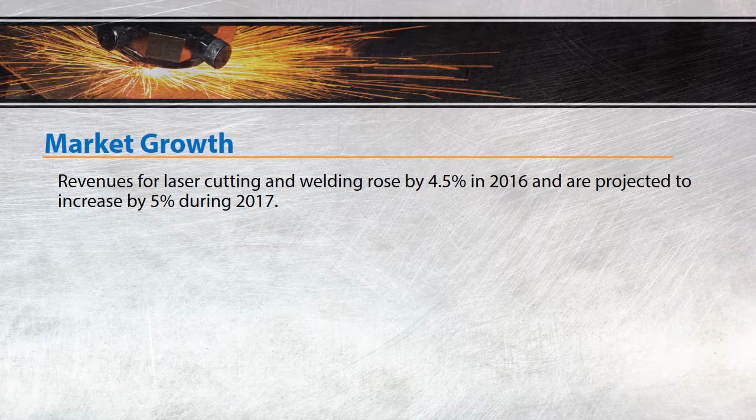According to an article issued by Industrial Laser Solutions for Manufacturing, revenues for laser cutting rose nearly 5% in 2016 and are projected to continue in a similar growth pattern over the next several years. Laser revenues increased from $1.42 billion in 2015 to a projected $1.56 billion in 2017. That's incredibly significant. Laser sales have been on the incline since the recovery from the 2008-2009 recession.

However, improvements to the fiber cutting laser technology over the past 3 or 4 years have created a demand in this market surpassing previous trends. More specifically, industrial lasers have been outperforming the machine tool sector for the past 2 years. Again, this is due to the demand for high-power fiber lasers.

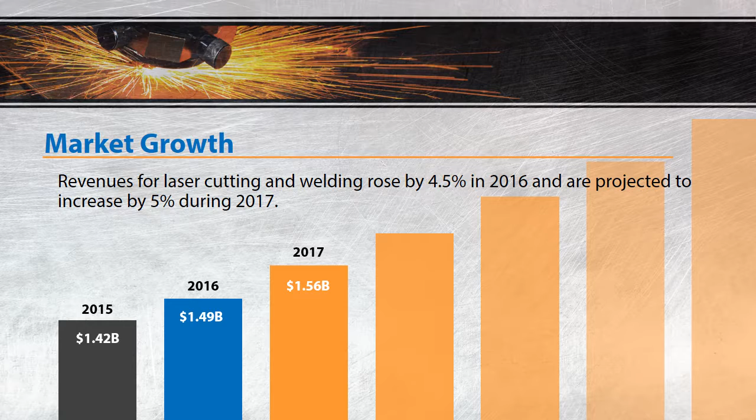Speaking of lasers, let's talk about the different types we're going to use for today's discussion: the fiber laser, the CO2 laser, and for today's discussion, we'll call the other category just 'other.' We can see from the chart that fiber lasers are 44% of the market. Why? Their increased efficiency means they cut faster, and decreased energy means they're less expensive to operate. Although fiber lasers have been around for several years, the technology has improved drastically over the past 3 to 4.

In fact, it's interesting to note that at power levels from 8 to 12 kW, the fiber laser can cut with the same quality as the CO2 laser, only faster.

I had the opportunity last year to visit FabTech in Las Vegas. It was great to meet many of our customers, and I had a great experience. I was excited to come back and share what I learned with my colleagues here at Hycomp.

According to 5 of the top laser manufacturers—Trumpf, Amada, Mazak, Bystronic, and Mitsubishi—they forecast a combined 800 new fiber laser systems into the USA this year, with an additional 100 in Canada, Mexico, and South America. This number should increase to 900 in 2018 and 1,000 in 2019. They're not seeing any pattern for slowing down new fiber laser sales in the United States.

Keep in mind, there's a strong possibility that 50% or more of the new laser owners will be able to justify in-house nitrogen generation based on their assist gas consumption and usage. We'll get into more details about assist gas in a moment, but I wanted to highlight the real opportunity in this market. One other interesting fact I noted at the show is that there was only one CO2 laser on display. We can see the fiber laser is taking over this market.

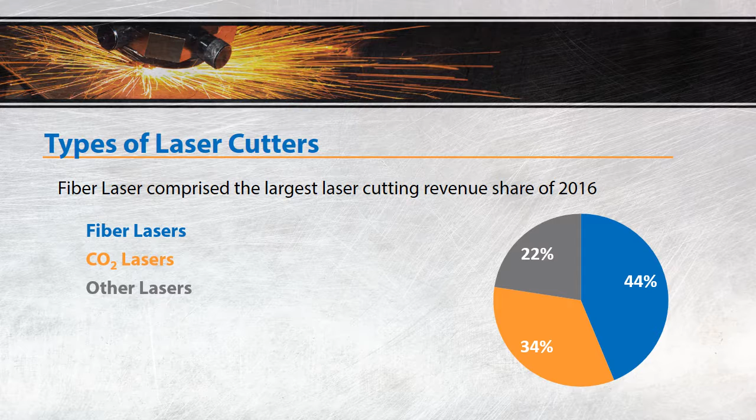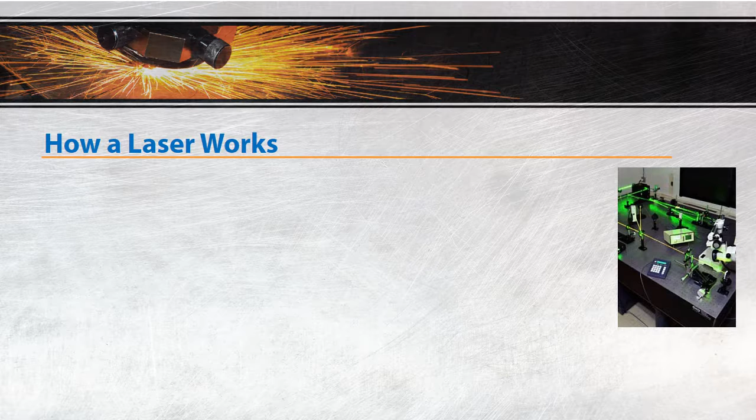Now we're going to turn it over to Robert, and he's going to discuss how lasers actually work. Let's take a little bit of time and talk about the basics of laser cutting machines. Many people don't know that the word laser is really an acronym that stands for Light Amplification by Stimulated Emission of Radiation. Quite a mouthful for a laser.

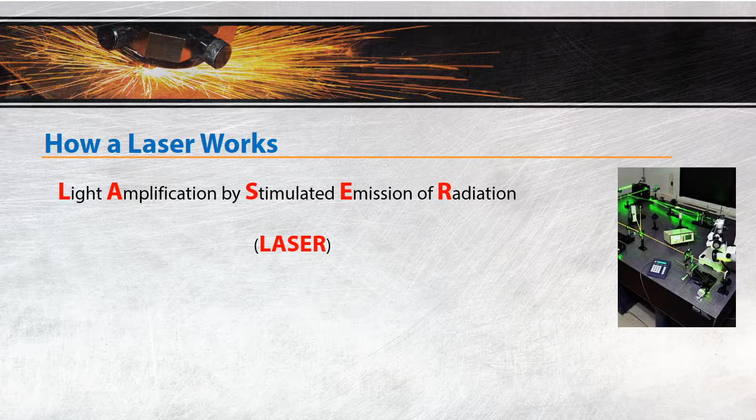A simple laser consists of 3 parts: an energy source to excite the electrons. In most cases, that energy source is a high-powered light, like a flash tube in your camera. The second is the lasing medium, which is the material, like CO2 gas, in which the atoms are excited, producing photons that are the actual laser light.

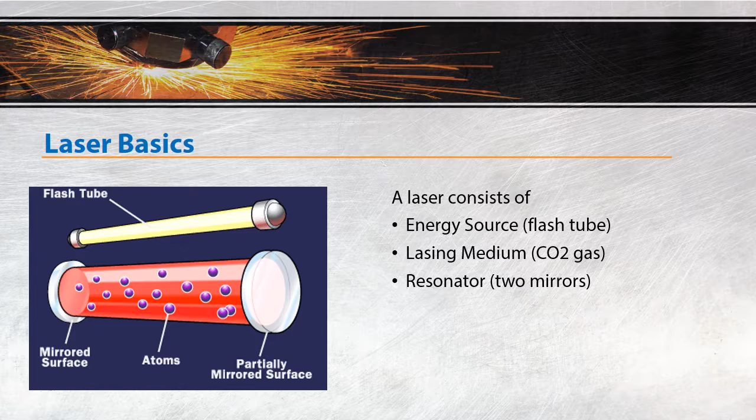It is important to note that laser light is not the light from the flash tube. It's actually the light produced in the lasing medium. And finally, we have the resonator, which is a set of mirrors that bounce the photons back and forth that are emitted from the lasing medium.

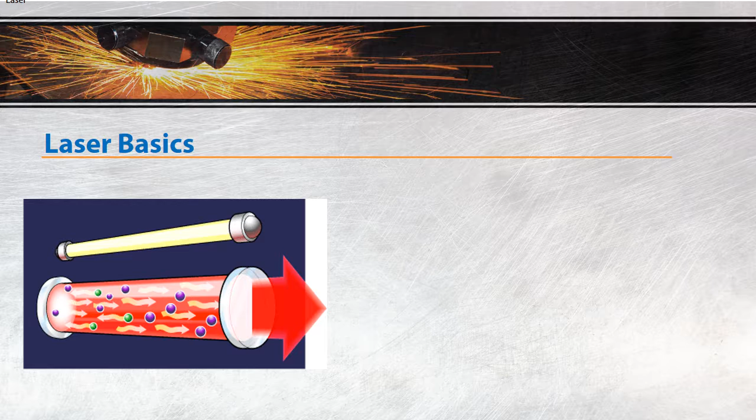In simple theory, the flash tube injects high energy light into the lasing medium. The light excites atoms in the medium, which subsequently emit photons. Those photons are identical in wavelength, what we see as color, and are coherent, meaning their wave crests and valleys are aligned. The photons resonate back and forth off the mirrors, and those passing through the lasing medium stimulate additional photon emission in other atoms. Finally, laser light is emitted through the partially mirrored end, often referred to as the output coupler.

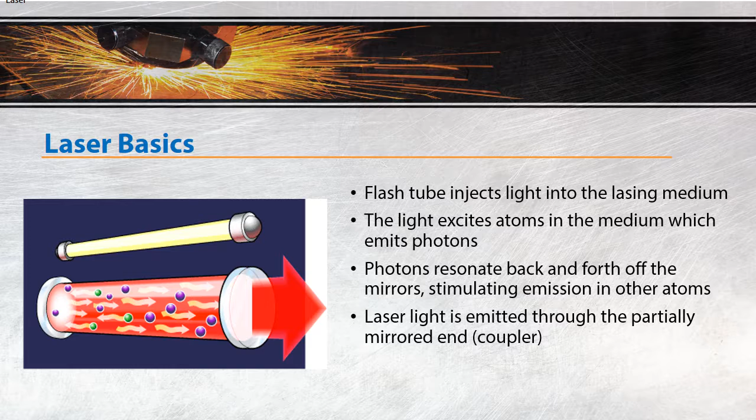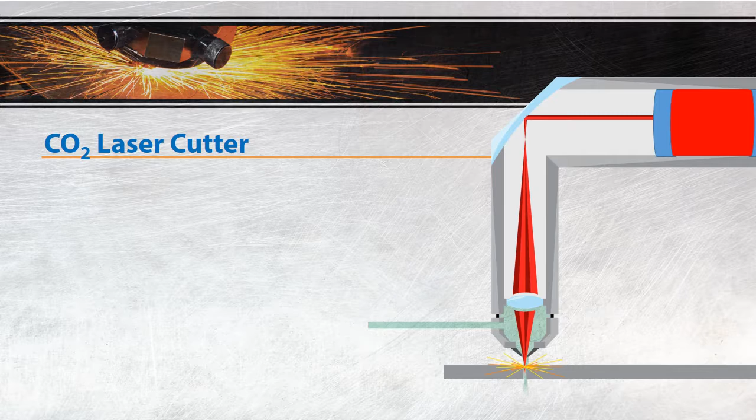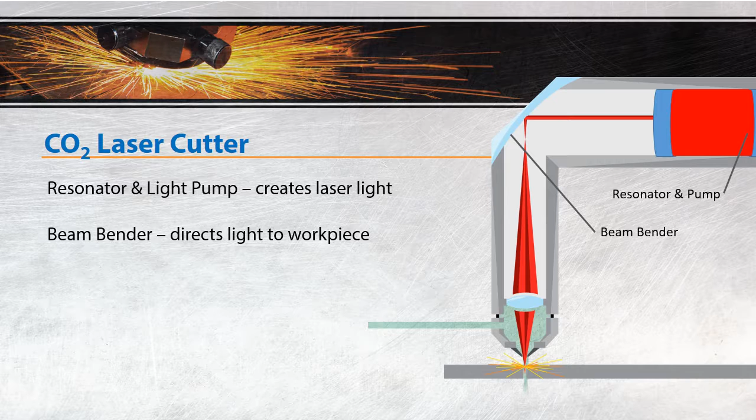One of the most common lasing mediums in the laser cutting industry is a CO2 gas mixture, hence the term CO2 laser Kelly mentioned previously. These laser cutters utilize the same basic concept of a resonator, lasing medium, and light pump to create the laser light. A beam bending mirror then directs the laser light to the workpiece. A focal lens intensifies the laser light to a fine point.

The assist gas, which is what we're mostly interested in today, protects the lens and sometimes the mirrors, and cleans the cut of molten metal. And finally, the focal point is the maximum focus point for the greatest heat.

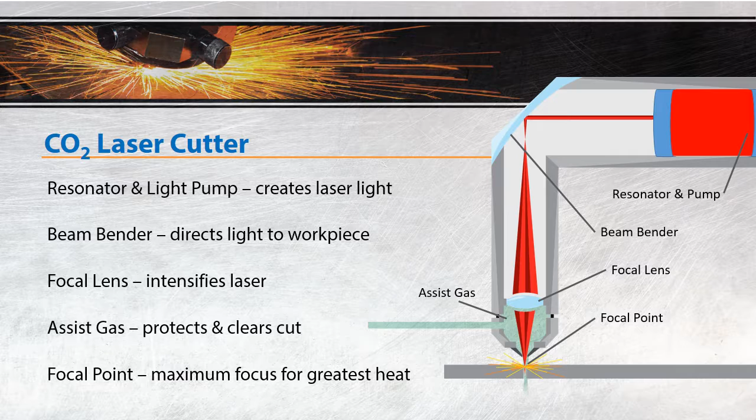Now, one thing to remember, a real CO2 laser is certainly more complicated as the cutting head must move around a 4 by 8 foot piece of material. So many mirrors are utilized to direct the laser light to the cutting head.

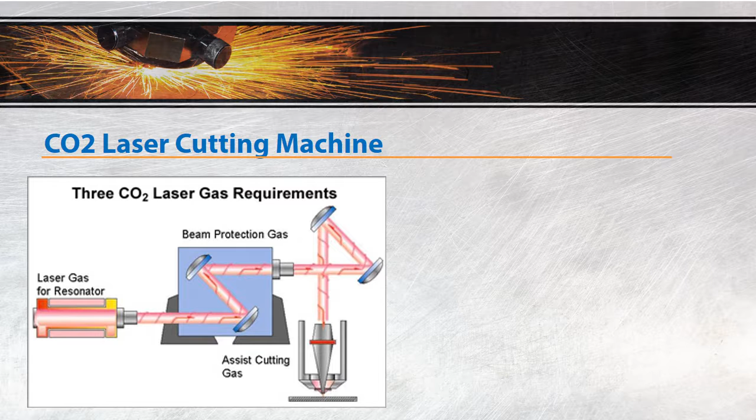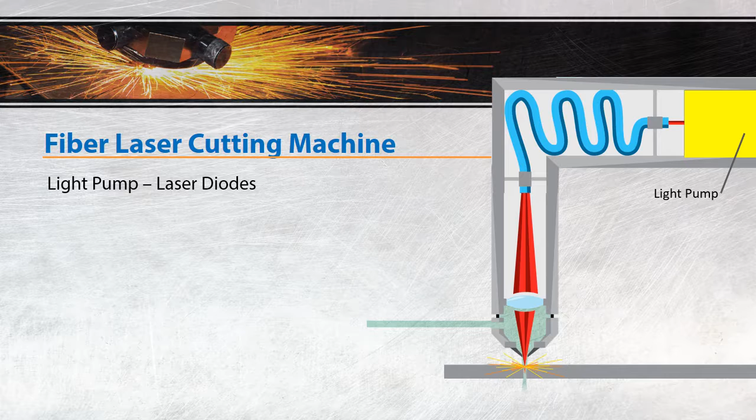Fiber lasers are similar in concept but different in design and build. Instead of a flash bulb as the energy source or light pump, they utilize laser diodes, which are similar to a high-energy LED that many of you are likely familiar with. Perhaps the biggest difference is the lasing medium and resonator.

Rather than CO2 and mirrors, a fiber optic cable is utilized. The fiber optic has been embedded with rare earth elements, often erbium or yttrium, and it is these rare earth elements that are the lasing medium. The fiber has small pieces of etched glass at the two ends that reflect the light created from the rare earth elements, thereby acting as mirrors and causing the photons to resonate and increase energy.

There is still a focal lens to intensify the light to a single point. Assist gas is actually more critical because a fiber laser has a much higher power density than a CO2 laser, and therefore requires even more gas to blow out the cut in order to take full advantage of the possible cutting speed. And certainly there is a focal point where the laser light is most focused in order to produce the most heat.

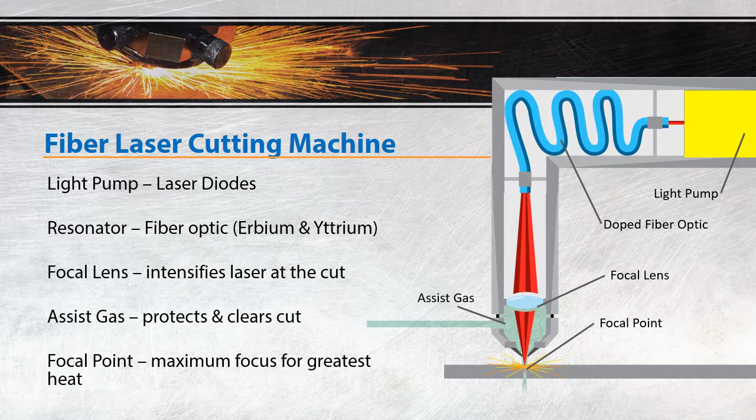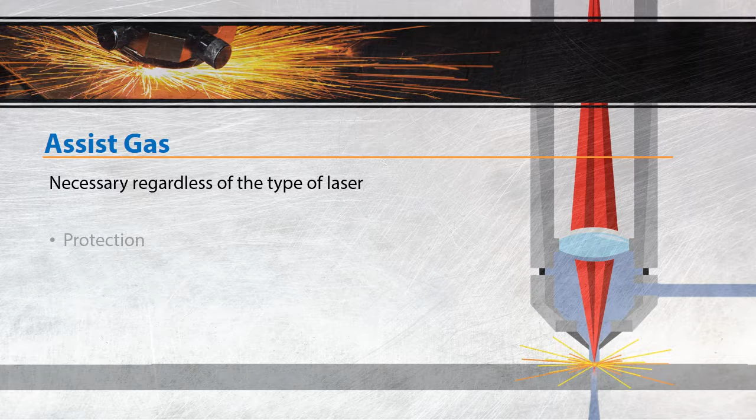Assist gas is actually a bit of a misnomer because it's really more of a partner than an assistant. As we saw, assist gas is necessary regardless of the type of laser, and it performs several functions. First and perhaps foremost, it protects the focusing lens from debris and damage. Next, it evacuates the molten metal from the cut. It's important to remember here that a laser doesn't vaporize the metal, it actually just melts it. And in order to achieve maximum cutting speed, that molten metal must be removed quickly.

Finally, in some cases, assist gas will actually aid in producing a hotter focal point, allowing for cuts in thicker materials.

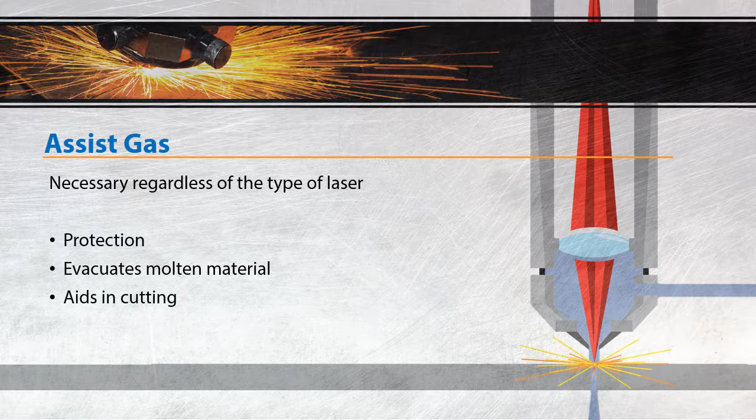There are three basic types of assist gas in use for laser cutting: oxygen, nitrogen, and air, which is of course 78% nitrogen, 21% oxygen, and balance argon, CO2, and other gases.

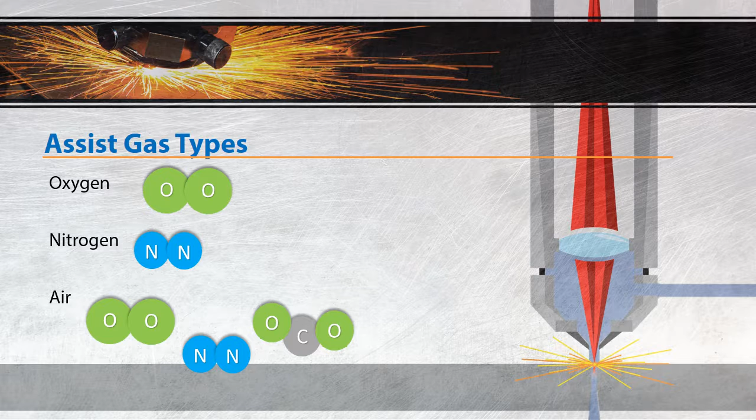Now, oxygen is actually exothermic, meaning it has a heating effect when used as an assist gas. Not surprising if you're familiar with an oxyacetylene torch. But this means that the laser can utilize oxygen as the assist gas in order to cut thicker materials, as it in essence increases the power of the laser.

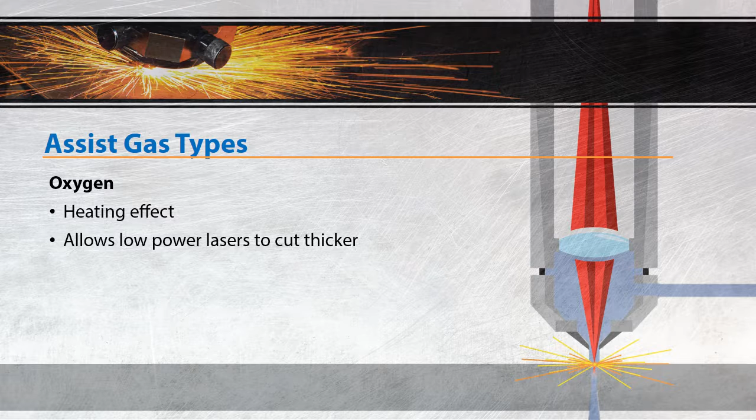Conventionally, it has been used on mild steel with thicker materials, although it has been used successfully on thick stainless as well. The pressure and flow requirements are fairly low, with pressures ranging in the 20 to 28 psi range. In fact, too much pressure or flow will cause the cut to widen significantly, leading to poor cut quality and dimensional failures. Of course, the downside to oxygen as an assist gas is that it leaves a heavy amount of oxidation on the cut edges, requiring a significant amount of post-production work.

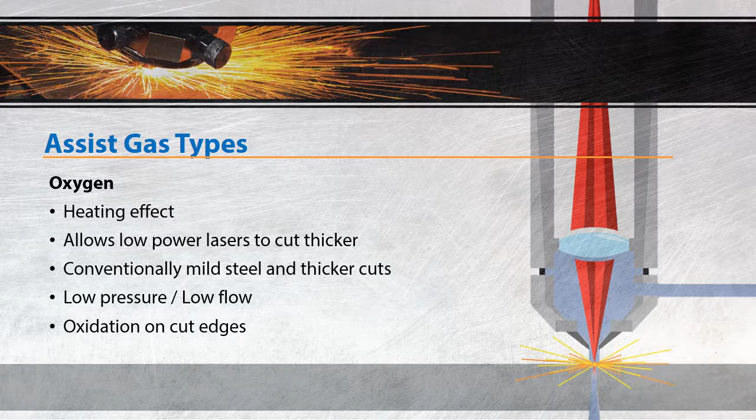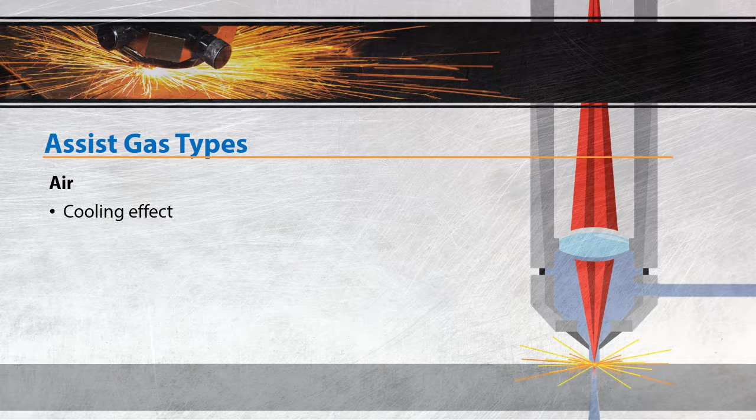Air has seen some popularity recently as assist gas. It actually has a cooling effect, which is not surprising when you think about a burst of air over molten metal—it's going to solidify that metal. Conventionally, it is used on thin carbon steel, where the edges are small and oxidation is limited. It also sees use on aluminum, since the small amount of aluminum oxide formed is clear to white and can actually give a nice looking protective coating to the finished part.

Significantly higher pressures and flows are required than with oxygen, and since it comes off a compressed air system, great care must be taken to ensure no oils are in the assist air. Obviously, there will still be some oxidation, but generally not considerable amounts, as air is still 78% inert nitrogen.

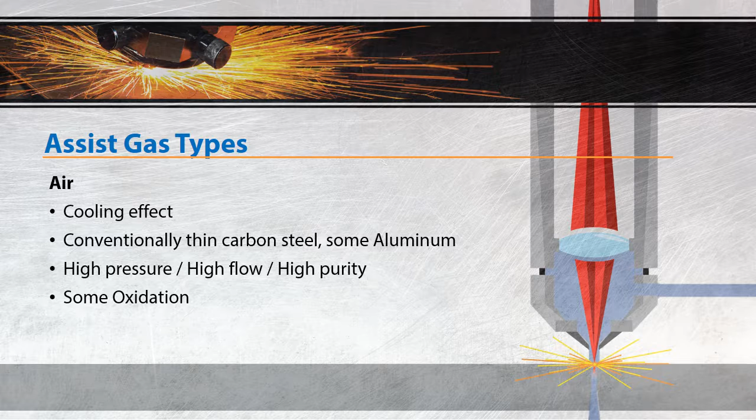Our final assist gas, and the one that we're really here to talk about, is nitrogen. Nitrogen has a similar cooling effect to air. Conventionally, it has been used on thinner stainless materials. I'm sure you understand that no one wants rust on their stainless parts.

But with the advent of the more powerful fiber lasers, lower cost in-house nitrogen generation, and the push to move away from post-processing operations like oxidation removal, you're going to start to see nitrogen used on carbon steel applications as well, which is obviously exciting for us as an industry.

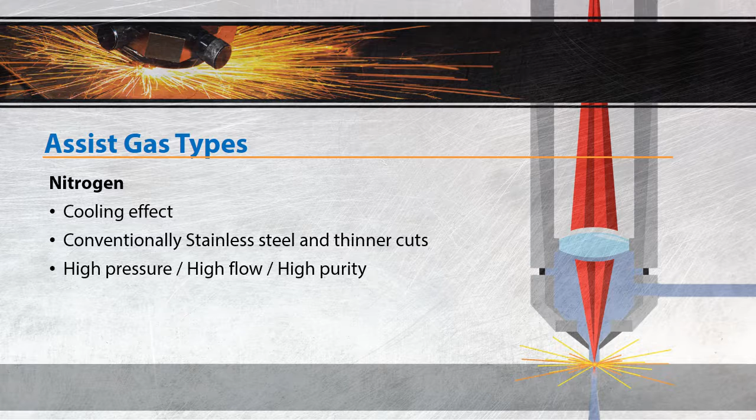Similar to air, high pressures and flows are required, again especially for fiber lasers, as they are capable of much higher cutting speeds and need that molten metal evacuated quickly. Certainly similar purity requirements exist to ensure a clean lens and clean cuts. The obvious big benefit is the entire lack of oxidation when utilizing nitrogen. We see a huge potential over the next few years for in-house nitrogen generation and find this to be a pretty exciting time for this product line.

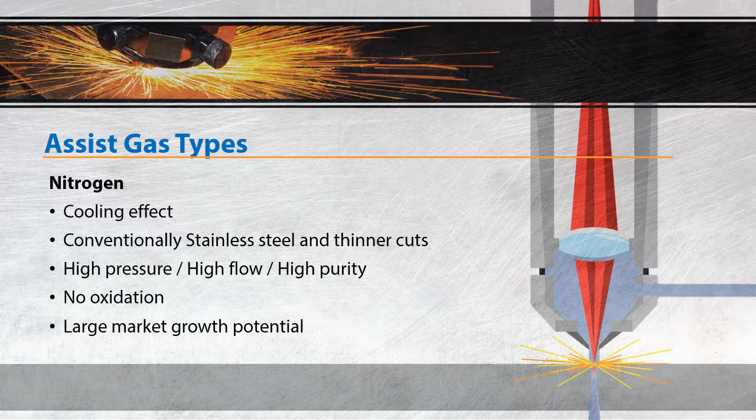So how much assist gas is required? Unfortunately, it varies widely. Things like material—whether you're cutting stainless, carbon steel, or aluminum—and the thickness of that material. Thicker materials require more assist gas to evacuate the molten metal.

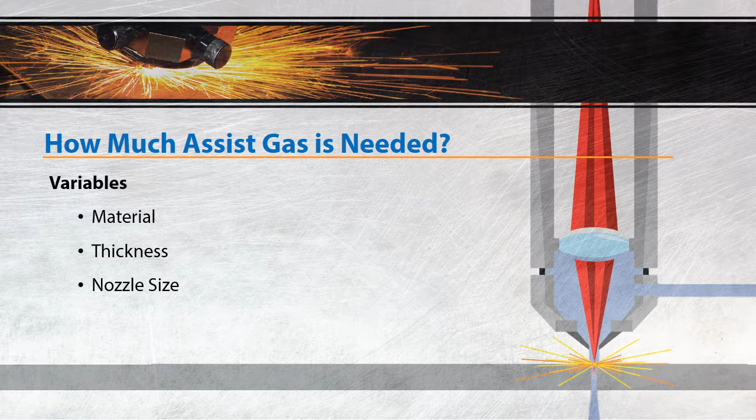Nozzle size—you may be familiar with flow through an orifice. Well, that's really all this is, and just like an orifice, the flow rate increases exponentially with size. For example, a 3 millimeter nozzle uses twice the flow of a 2.5 millimeter nozzle. And finally, cut speed and edge quality will affect how much gas your customer uses.

Real quick, this question—how much nitrogen do you need—is really the key question to help us understand if your customer can justify in-house nitrogen generation. So this piece of the puzzle is key, very important. Absolutely. Return on investment is going to almost entirely depend upon how much gas the customer is using, and the cost of that gas.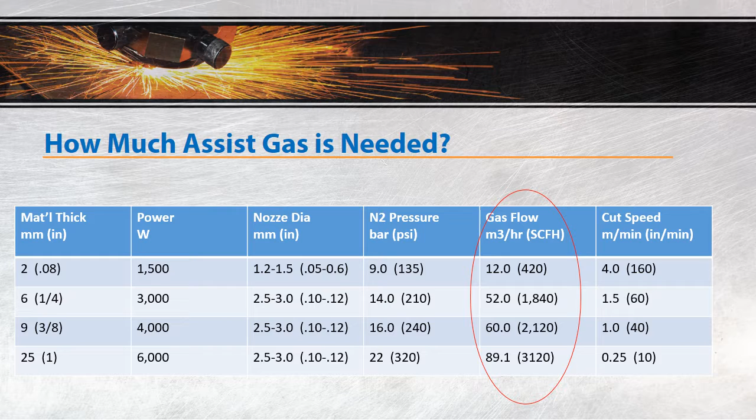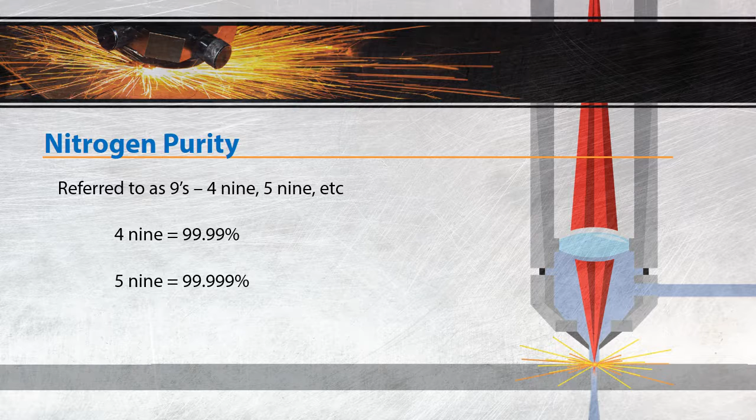Another important aspect to consider is the purity of that nitrogen. One of the terms you're going to come across is 4 nine or 5 nine purities. This is generally in reference to the amount of oxygen present in the gas. To clear the proverbial air, 4 nine is 99.99% nitrogen, or less than 100 ppm of oxygen, while 5 nine is less than 10 ppm of oxygen, or 99.999%.

Another concern with nitrogen purity is the amount of hydrocarbons present. Oils are an absolute no-no when it comes to laser cutting. The standard recommendation for laser cutting cleanliness is ISO 8573.1, Class 1, which has a limit of less than 0.008 parts per million of hydrocarbon—that's 8 parts per billion.

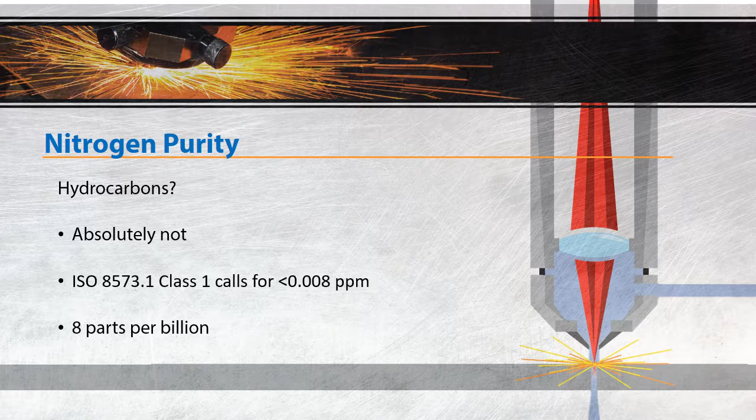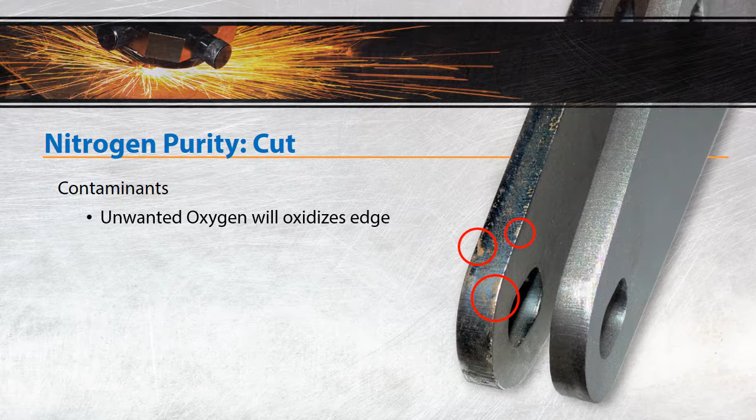Purity affects the cut quality of the workpiece. Unwanted oxygen leads to rust on the edges of a stainless or steel part, and oil in the assist gas will cause the laser to burn hot, resulting in poor cut quality. Either of these two purity issues lead to additional post-processing costs.

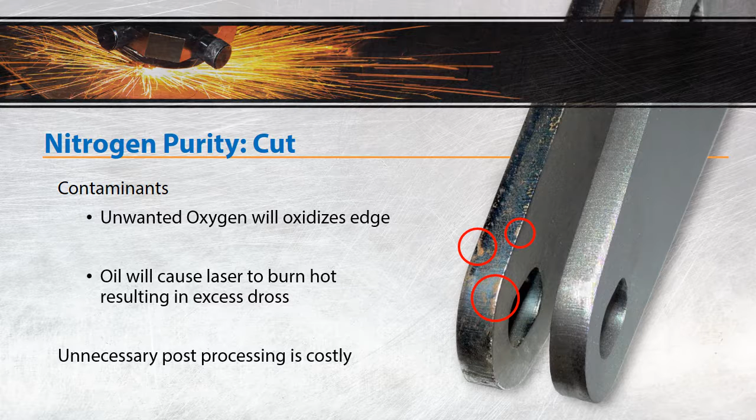The larger concern, however, is with oil damaging the optics of a laser. If the lenses or mirrors of the laser are covered in an oil film from the gas, two major problems will occur. The first is a decrease in laser efficiency due to scattering of the laser light, which means slower cuts and higher cost per part made. But worse, once an optical lens or mirror gets dirty, they will begin to retain heat from the laser, which then warps that optical piece.

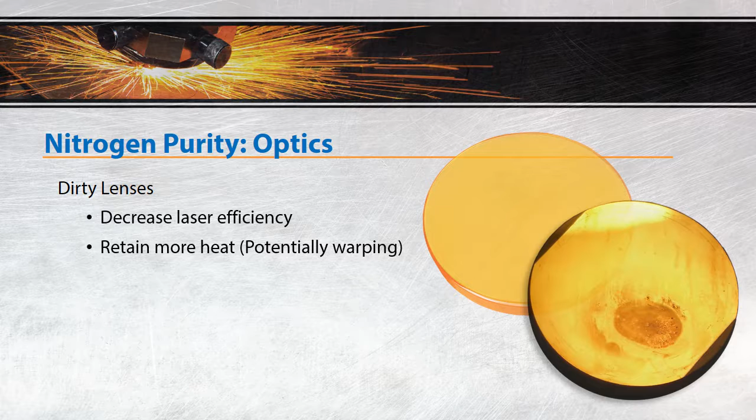As you can imagine, that means the optical device must be replaced. So what's the cost of contamination? A simple optics replacement can run $15,000 to $18,000.

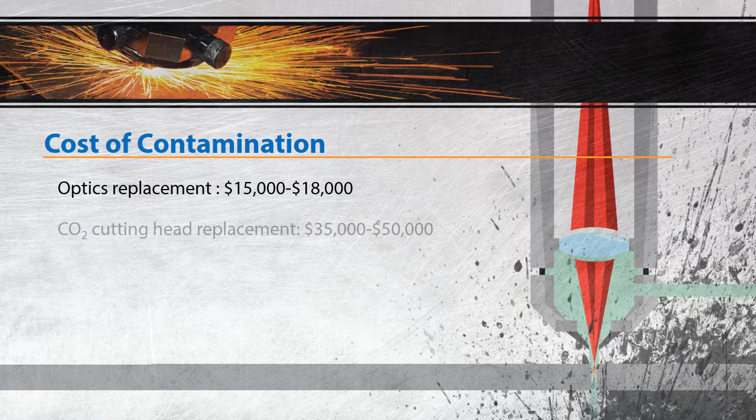If it gets really bad, a full CO2 cutting head replacement is $35,000 to $50,000, while a fiber laser cutting head replacement can run up to over $100,000. I'll share with you a quick report from an end user, a laser user.

$250,000 of damages due to a filtration failure that did allow some hydrocarbons to contaminate the laser. To put that into perspective, the average CO2 laser is $900,000 and the average fiber laser is $1.25 million. So $250,000 in repair due to contamination is quite significant, and certainly makes us understand why it's so important to have pure, clean gas for that customer.

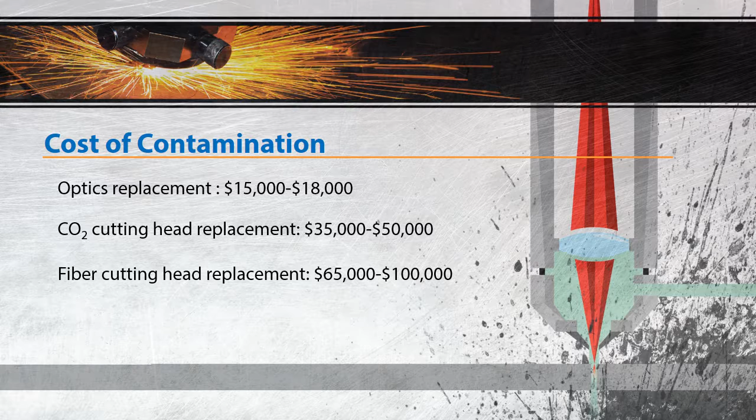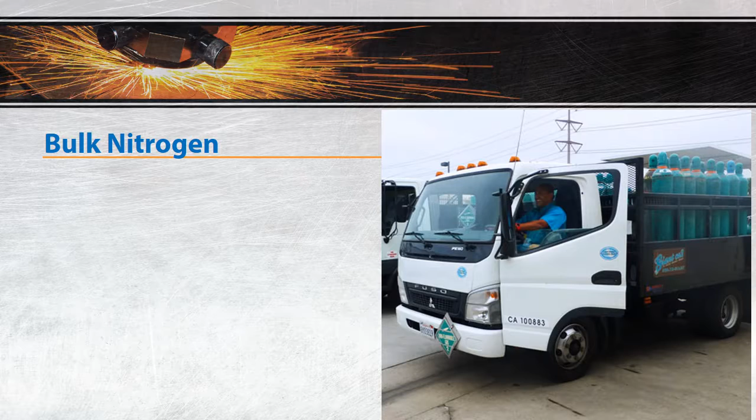At this point, I'm going to turn the time over to Ken to talk about sources of nitrogen assist gas. Thanks so much, Robert. Understanding how the laser works will give our attendees confidence when presenting to their customers. Let's talk about the various sources of nitrogen and how they're different.

Bulk nitrogen is delivered in two forms or phases, liquid or gas. The advantage of bulk nitrogen is you are guaranteed the purity of the gas. I want to share with you some of the cons of bulk nitrogen delivery.

First of all, logistics and safety. Nitrogen delivery is an added labor for you and your customer, and is provided in high pressure tanks. Typically, DOT bottles are about 2200 psig, maybe even higher. Safety is always a concern when you're dealing with high pressure gas, toxic gas, along with potential delivery accidents.

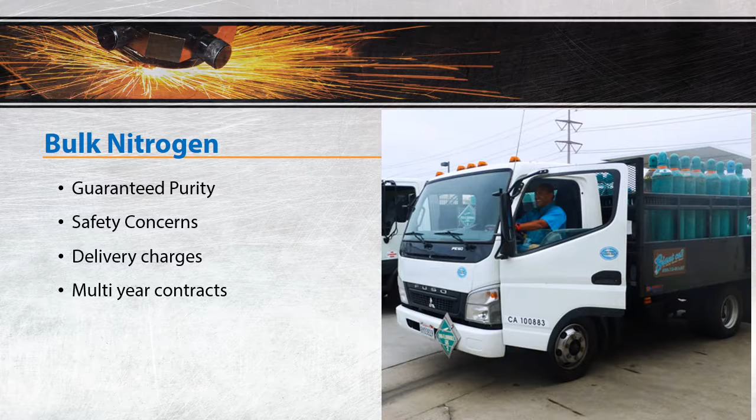Typically, there are delivery charges each time the gas is provided from the bulk provider. Most bulk providers have your customer sign long-term contracts. Your customer may or may not like their contract years later. Exiting a bulk nitrogen contract typically is not easy and frequently requires long advance notice. And then, of course, you've got that monthly bill.

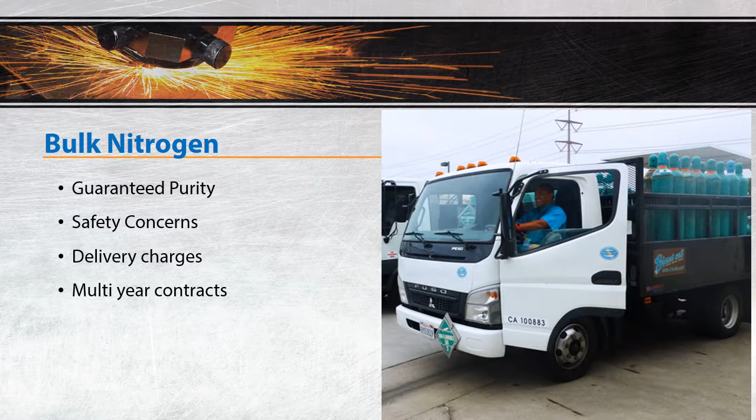Let's talk about liquid nitrogen delivery. Nitrogen in liquid form is minus 321F or minus 196C. The liquid nitrogen then moves to the heat exchanger where the nitrogen temperature is raised. In the gas phase, the nitrogen is regulated to a usable pressure.

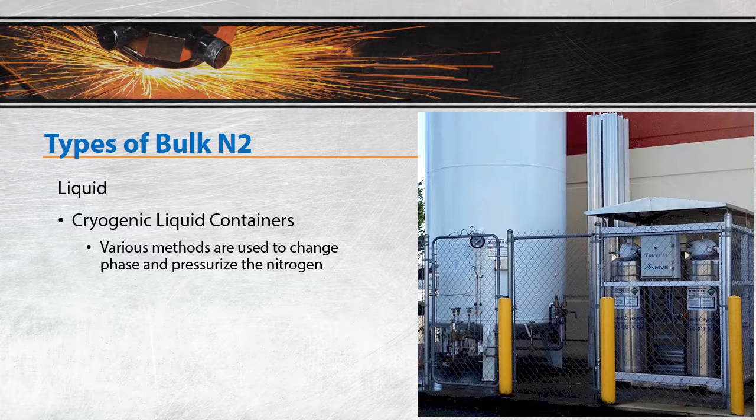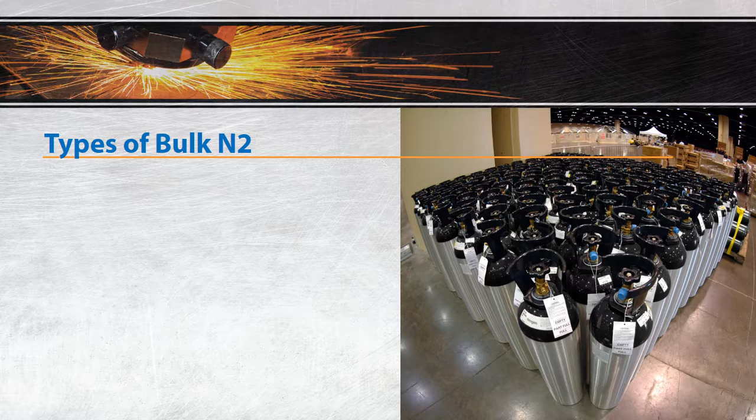Bulk nitrogen is typically delivered in high-pressure DOT cylinders. This is very common to those who are low users of nitrogen. The pressurized cylinder is depleted until you reach the pressure used by your laser. Consequently, the remaining gas is returned to the vendor, even though your customer has already paid for it.

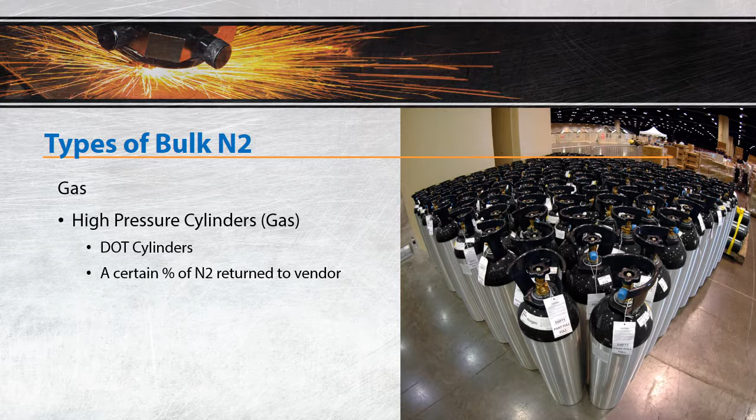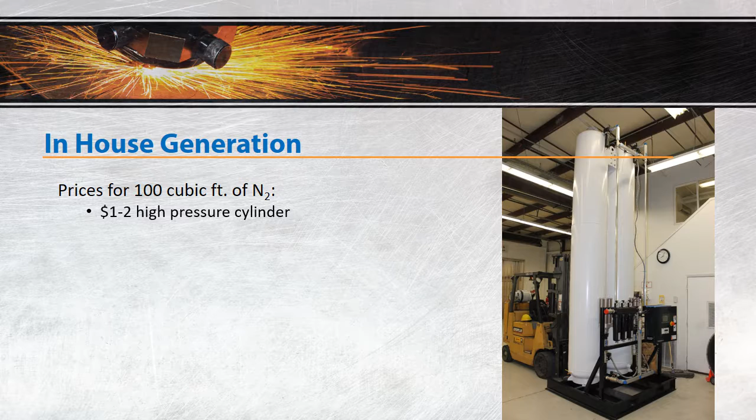Now let's look at how bulk nitrogen compares with in-house generation, speaking in terms of 100 cubic feet in pricing. High-pressure cylinders are about $1 to $2 per 100 cubic feet of nitrogen. Bulk liquid is less expensive at about 50 to 75 cents. Now, this is what is significant.

Wait for it. Thanks, Kelly. Drum roll, please. In-house generation is about 12 to 15 cents per that same 100 cubic feet of nitrogen. And we've just had a report recently of as low as 8 cents per 100 cubic feet for in-house generation.

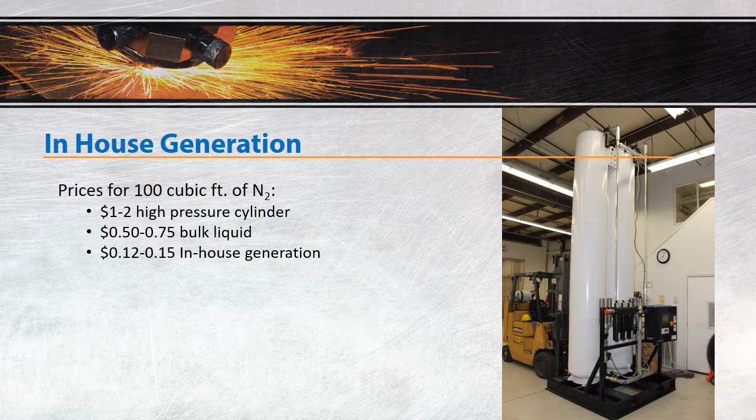Kelly, that's huge. With in-house generation, you can get a return on investment as short as 1 to 2 years, depending on the customer's usage. But here's another aspect to look at: if you finance your equipment, the monthly cost may be less than that bulk price. And the beauty is you own that equipment once it's paid for, and you don't have to keep paying that monthly bill.

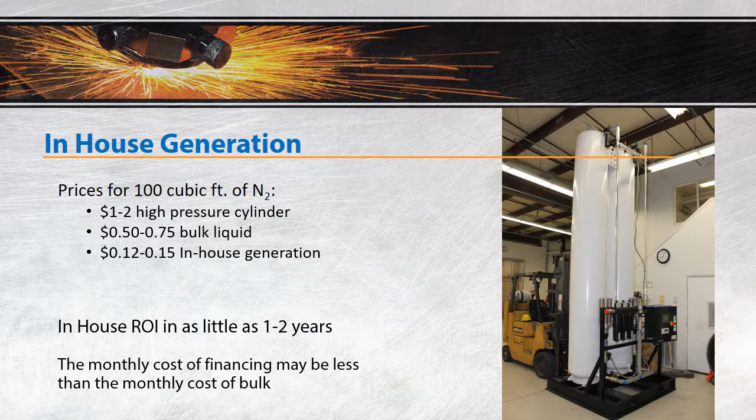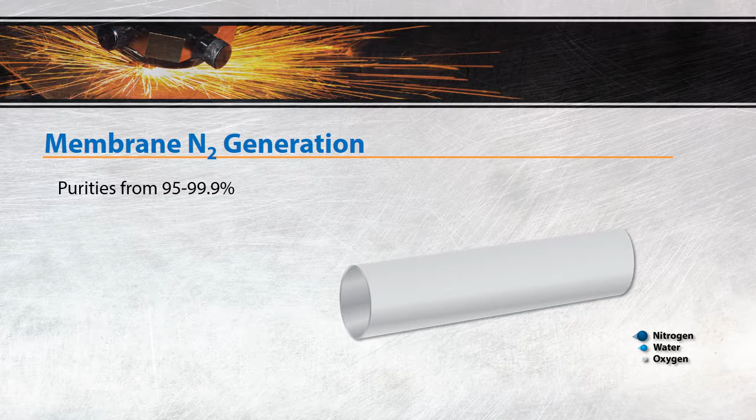Now let's talk about the different methods of nitrogen generation. One method of in-house generation is accomplished by a membrane. You're able to receive about 95 to 99.9%, or as Robert stated, 3 nines in purity. Consequently, membranes are not often used in laser cutting.

Compressed air enters the membrane from one end. Oxygen then escapes out through the sides of the membrane filters. Nitrogen continues through the membrane and exits out the other end.

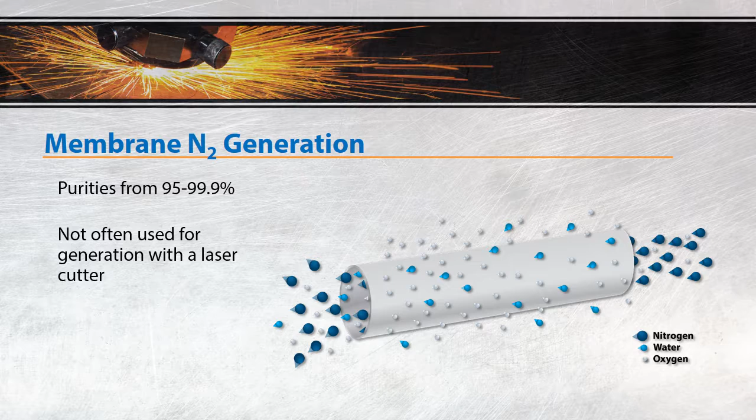The other standard within laser cutting is the PSA, or pressure swing adsorption generator. As Robert mentioned, 78% of air is nitrogen and 20.9% of air is oxygen. So what you do is you force air into a sieve bed. The sieve bed contains carbon molecular sieve, or CMS.

And quick fun fact - yes, Kelly - on the CMS, it happens to be made of coconut shells. Oh man, I love that fact. Kelly, I probably wouldn't have made it through the webinar without knowing that. Coconut fibers, to be exact.

These coconut fibers, or holes in the CMS, are so small that the oxygen molecules pass by them and get captured inside the cavities in the molecular sieve. The nitrogen molecules remain outside and are separated from the oxygen. Once the separation occurs, the free-floating nitrogen molecules are released at low pressure and captured in a surge tank. Once the nitrogen leaves the sieve bed, the pressure is released quickly, allowing the oxygen to escape into the air. The sieve bed is now ready for the next cycle.

PSA generators are able to produce high purity nitrogen, 4 nines or 5 nines like Robert was mentioning, capable of cutting thick metal sheets of steel and even stainless steel up to 11 gauge.

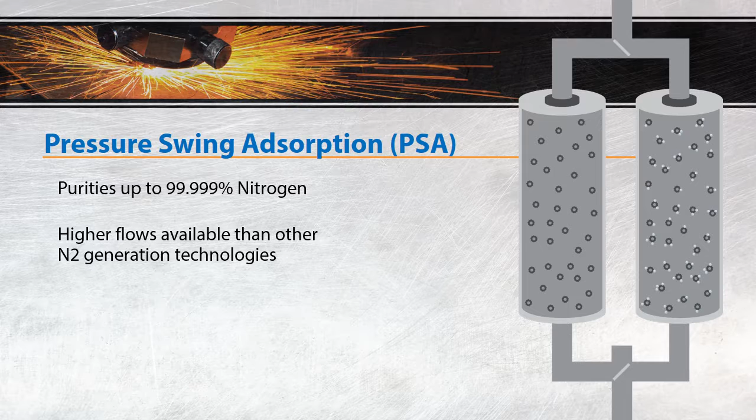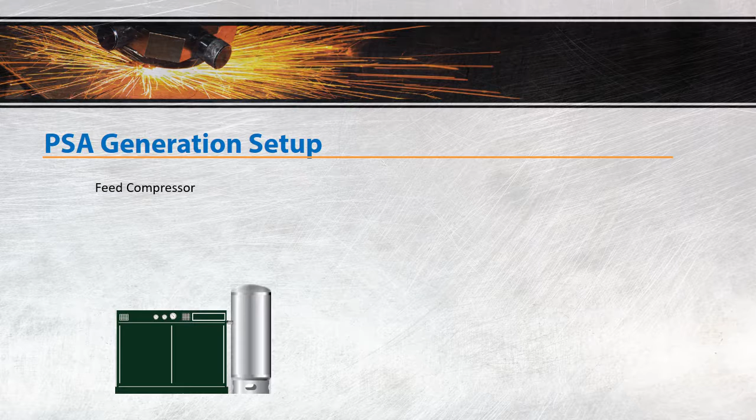Just real briefly, I want to show you what a typical PSA generation setup looks like. You start with a low pressure screw compressor, then a dryer, usually inside that compressor. This feeds an initial storage receiver. The nitrogen generator has 2 sieve beds filled with carbon molecular sieve, CMS, or coconut fibers. Nitrogen is then fed into a generator receiver. The high pressure nitrogen booster builds up the pressure required by the laser and is fed into the final storage tank, which the lasers draw from.

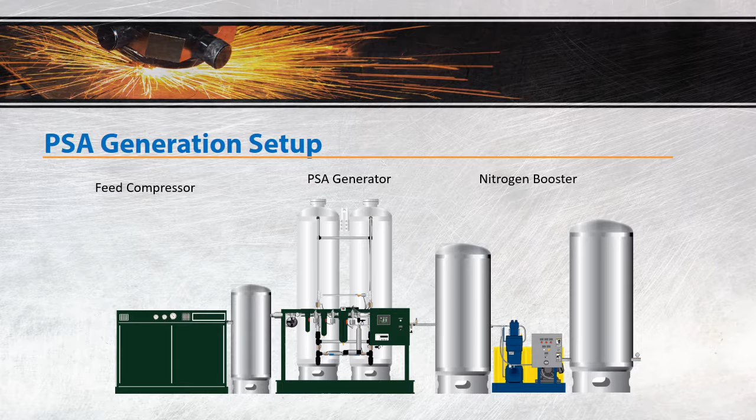In conclusion, how does in-house generation make sense compared to bulk providing? The further your customer is away from the bulk supplier, the more sense it makes.

Kelly, would you like to share that experience of how you were able to see this difference? Quick example: we had a report of a customer purchasing a $65 liquid dewar in the Twin City area of Minnesota. That same liquid dewar sold for $210 in Fargo, North Dakota, about 250 miles away, nearly quadrupling the price. So what you're saying is the further away the customer is, the more money they have to pay. That's right.

So in-house generation makes sense there. You don't have the delivery charges, and the generation is right there in the plant. Exactly. Now, fab shops are a great opportunity for in-house generation, and this is what we found with fab shops.

Fab shops are nimble, dynamic, and forward-looking. Because of that, they look for any opportunity to save money and become more competitive. In-house generation is a great cost-reducing opportunity for fab shops who are literally competing with OEMs and the fab shop down the street.

OEM manufacturers can be high users of nitrogen and can have up to 3 shifts. Because of this high usage, in-house generation makes perfect sense for them, and it's a great opportunity. The trick with OEMs is you want to talk to a decision maker who understands the entire process and the entire costs of the plant.

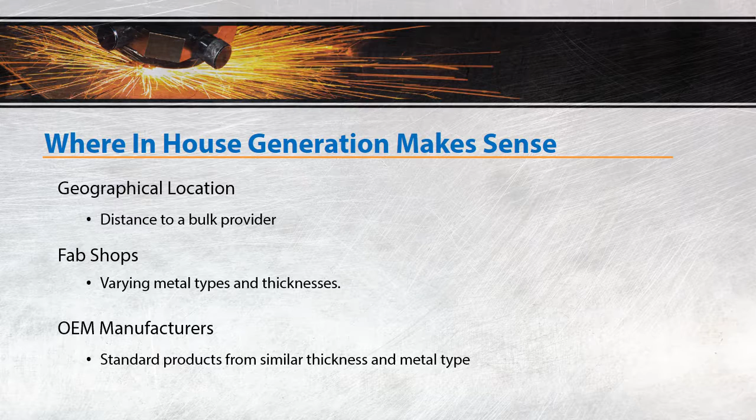I now want to turn the time back over to Robert for some additional technical information.

Thanks so much, Ken. We'll briefly talk about some nitrogen compression solutions. There are obviously 2 basic compression solutions: one is oil flooded, the other is oil free. The key difference between the two, of course, is the oil in the gas stream, which absolutely must be removed.

We could spend the entire webinar on compressed gas filtration, so I only want to touch on a few key points. Aerosols are problematic in the 1 to 0.01 micron range, but fortunately a good coalescing element can take care of this. The problem in meeting Class 1 requirement then is the oil vapor itself. A properly sized and properly maintained activated carbon filter can remove oil vapors down to 0.003 parts per million, which is well within the Class 1 requirement.

But the important thing to remember is that activated carbon filters can only absorb a certain amount of oil vapor before the micropores on the surface are saturated. At that point, the filter is done, and oil vapor will pass through without impediment. Your customer may not even know it. Remember, DP gauges are not super useful in an activated carbon filter.

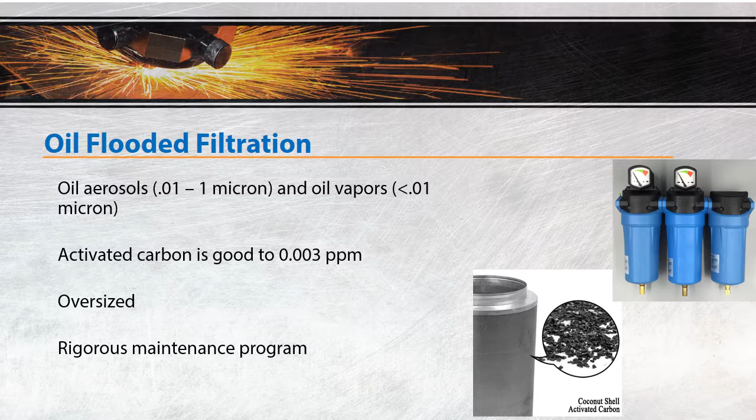As you can imagine, in our particular position, we've heard stories of contamination to lasers and generators. The issue at hand is not the filtration, but rather the maintenance of those filters. Based on our experience, we recommend installation of oversized filters and the implementation of a rigorous maintenance program. Make sure users are changing those filters regularly. Proper maintenance of the oil flooded booster is critical as well, to ensure minimal oil is passed downstream to the filter pack.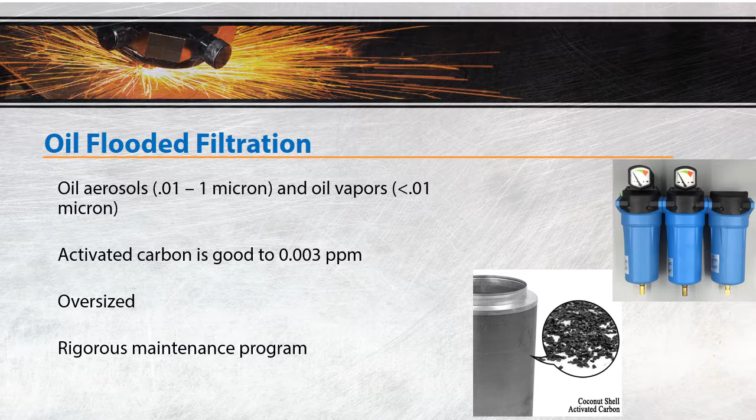Perhaps even a single shift running intermittently could benefit from this type of solution. Absolutely, that's probably your ideal installation, in fact.

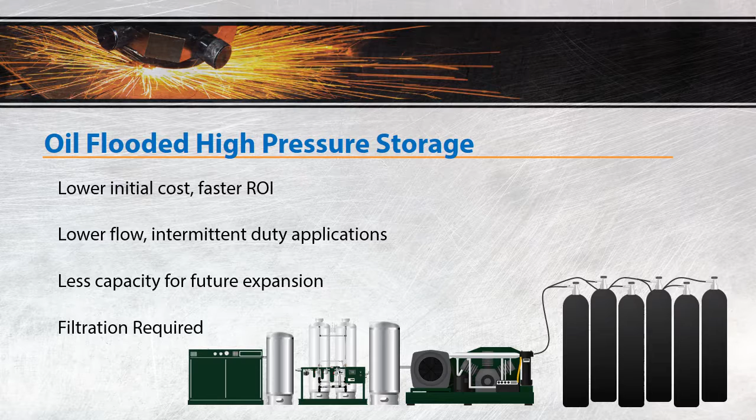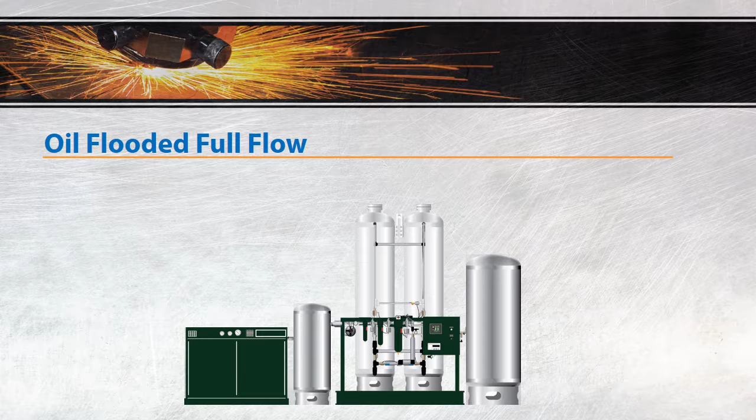So the oil flooded full flow solution is something you are all probably very familiar with. A feed air compressor, dryer, and storage tank feeds a nitrogen generator sized for the full demand and possible future expansion, feeding an oil flooded booster, which then pumps up a mid-pressure, say 450 psi, storage receiver. This is a mid-level entry cost as the generator is large enough to handle the entire demand plus possible expansion. Depending upon the oil flooded booster chosen, true continuous duty operation may be possible, making this solution a reasonable choice for higher demand, multi-shift, and customers that see growth potential in their near future. Of course, filtration is still required to ensure gas cleanliness.

It's probably important to note here that there are a wide range of oil flooded boosters available with varying costs, varying quality, and varying life cycles. Do your homework with your customer to understand their needs and choose a booster that best fits those needs.

Just a real quick thought on this, Robert. While this is a widely accepted and certainly a perfect solution that works well, it's always been interesting to me to think of taking purely produced nitrogen at this five nines purity or however it is, and then potentially introducing that or exposing it to oil only to be cleaned up again before reaching the laser. Absolutely, it seems a little counterintuitive. And I've even noticed when looking on the websites of some of our generator manufacturers, one thing they point out is high purity, high purity, high purity. Right, interesting conundrum for sure.

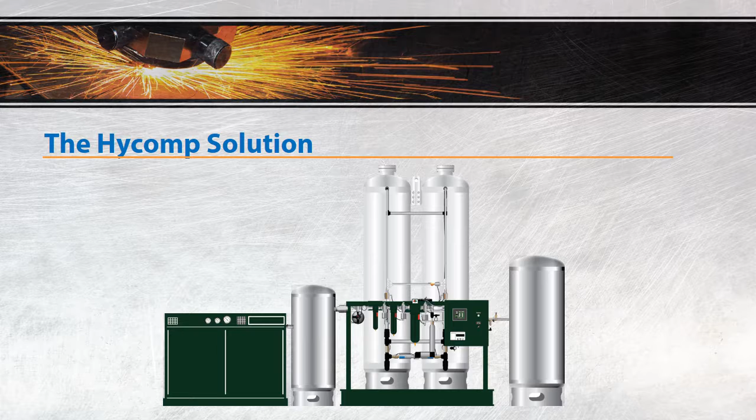All right, so now we come, of course, to our favorite solution, the oil-free full flow. Again, a feed air compressor, dryer, and a storage receiver feeds a nitrogen generator sized for full demand and possible future expansion, and an oil-free booster with a mid-pressure, again 450 psi say, storage receiver. And this is the highest entry-level cost, as the generator is full-sized and the booster is oil-free. But that cost doesn't differ hugely from a high-quality oil-lubricated version and certainly has some significant benefits.

The Hycomp booster is a true continuous duty compressor with a 20-year life expectancy, making this solution a good choice for those same higher demand, multi-shift customers that see growth potential in their near future. A great point to make with your customers is why would they want to get out of that contract you mentioned, Ken, just to get into a regularly recurring cost for filtration? Why escape that same contract and end up with a booster that needs replacement every 5 to 10 years if they're a heavy-duty continuous user? Plus, as there is no oil in the compression chamber, we are not adding oil back to the already very clean nitrogen coming from the generator, which means no risk to your laser, no risk of contamination to your cuts.

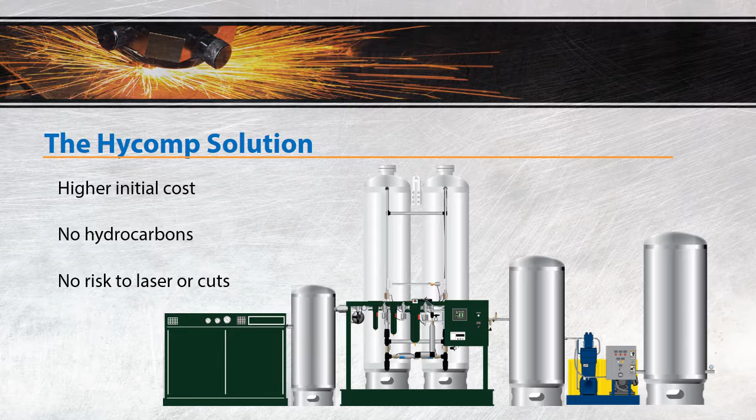All right, so why are we the leader? Why are we holding this presentation? What makes us think that we should be doing this? The oil-free design and long service life made a Hycomp booster ideal for this application back in 2000.

I personally sold our very first nitrogen booster accompanying an in-house generator to a manufacturing facility right here in Utah. By 2002, we had partnered with one of the first generator manufacturers, pairing our booster with their generator. In 2009, we formed a strategic alliance with a laser expert who had a series of representatives throughout the U.S. And just last year in 2016, we recognized that as the nitrogen generator market was beginning to become more competitive, margins and prices were dropping, and we started to look at how Hycomp could stay competitive. This year, we're excited to be rolling out our new Odyssey line, the result of a year of market research, engineered system redesign, and Six Sigma standard implementations to ensure that we are, and you are, competitive.

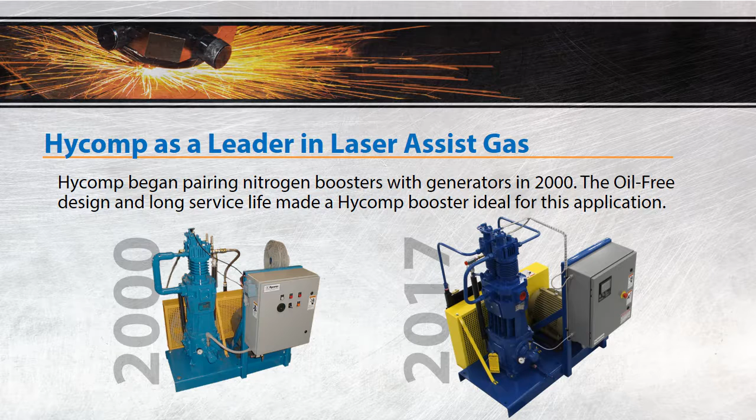But that Odyssey line still utilizes the same Hycomp oil-free booster design we've always produced. We start with a pressure lubricated bottom end, utilizing a full flow oil pump and filter, tapered roller bearings, rifle drilled crankshaft and connecting rods, with needle roller wrist pin bearings. What do you get for all this? You get a 20+ year life expectancy out of the power end.

Next comes the distance piece that separates the oil lubricated end from the oil-free compression end. Ground and polished piston rods move through self-adjusting oil scrapers to ensure the oil stays in the bottom end, while the distance piece ensures there is no overlap between oil lubricated and oil-free.

Finally, the oil-free compression end utilizes high-end polymer piston rings specifically designed for use in dry nitrogen, something we've learned about over 17 years of compressing. Stainless steel plate-type valves, not reed valves, control the flow of gas through that compressor. And all castings are iron, not aluminum, to ensure good vibration dampening and good dimensional stability.

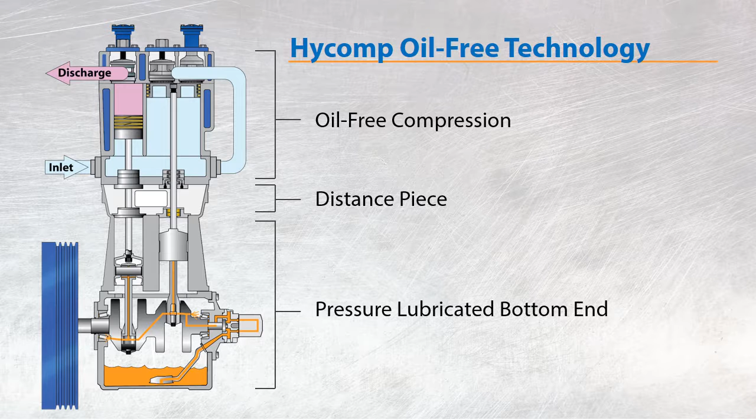Let's get into a little bit more about the nuts and bolts of our Odyssey nitrogen booster line. We have 10 boosters available. There's pressure ranges from 300 to 600 psi on the discharge. Perfect for a laser, averaging a point of use pressure of 300 to 400, so you have some storage capacity as well. And then a flow range of 500 to 12,000 CFH.

Now, as Robert mentioned, this is the same compressor that we've been manufacturing all along. We are very proud to say that our compressors are made right here at our factory in northern Utah. That made in the USA is something that we are very proud of. As well, our parts are manufactured, stocked, and serviced right here from our facility in Utah.

We have been able to standardize parts between models. This allows more availability to our customers, and we should note that a lot of our replacement parts ship the very next day. We have pre-designed packages including drawings and manuals. This is as close to off the shelf as we have ever been here at Hycomp.

Also, reduced delivery times. We've been able to nearly cut our delivery time almost in half since 2014, coming in at an average delivery right now of about 8 weeks, which is right in line with your laser delivery and your generator delivery, your tank delivery, and so everything lines up just perfectly for your customer.

Also, very exciting, you will be able to price your own system. And this is something that's new and has to do with this rollout and this sales toolkit that I'll touch on just briefly. This sales toolkit that we want to make available to everyone in attendance today has an easy sizing calc program, again, where you can size up your own system.

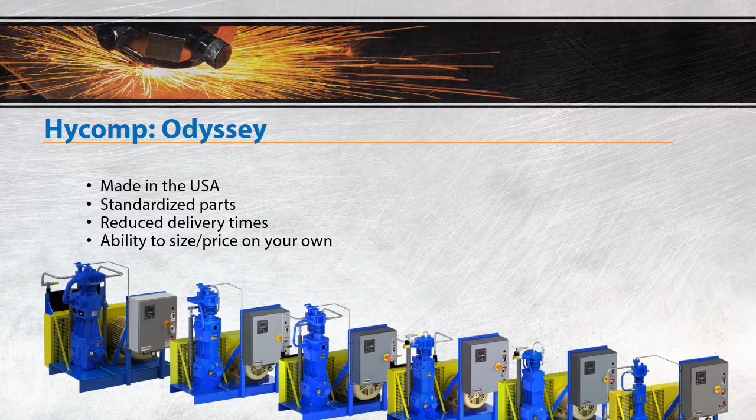So let's just cover quickly where to find customers in this market. Now, this first one might be kind of a given. It's to search by NAICS codes and SIC codes in your area. The 31 to 33 series cover majority of manufacturing, so you can kind of dig in there. If you're interested in a fuller or more complete list, get a hold of us and we'd be happy to help you out with that.

Also, as Ken touched on, these metal fabrication shops, sometimes known as job shops, where they are working, they're a bit more flexible. They're heavy users of lasers. So those are definitely a good potential. Also, original equipment manufacturers utilizing sheet metal in their product, all sorts of markets, aerospace, automotive, agricultural equipment, construction equipment, electronics, what's being manufactured in your region. And there's probably a need for a laser there.

Another interesting thing I found at FabTech, I'll touch on just briefly, is the laser manufacturers. Now, in the past, the nitrogen was kind of just brushed off or kind of brushed under the rug as a utility, and the end user had to go figure it out on their own. As nitrogen is becoming more relevant and the need for it and the volume is increasing, they are wanting to get on board and taking more of an interest in the nitrogen solution. So keep that in mind as well.

Kind of piggybacking on that is the laser reps. These sales representatives that have that relationship with the end user. They also want to be able to provide a full solution to their customer. It helps them and their rapport and reputation that they have with that customer to have a solution already available. So align yourselves with those laser reps if at all possible.

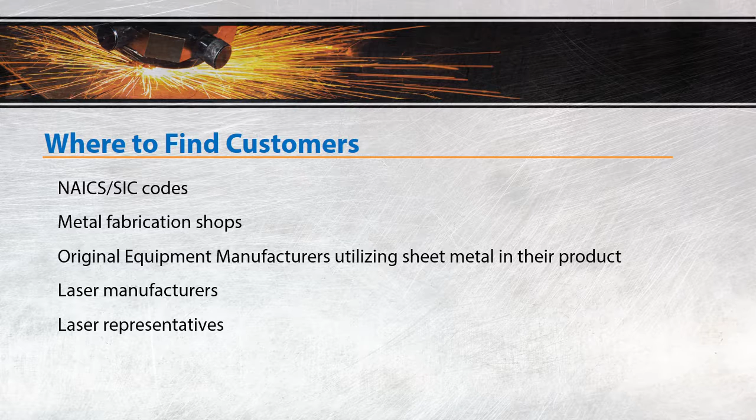We're going to take a quick second to summarize. We've reached the end of this segment of the presentation. We hope we've been successful in presenting some exciting information about the laser market in general, and some of the growth we've seen with fiber lasers, as well as the basics of how a laser actually works, which was fascinating to me.

Also the importance of assist gas, that we've covered some types of solutions, not only with nitrogen being in-house, the various in-house nitrogen solutions, but also the solutions for compression of that nitrogen to get up to the pressure needed for the laser. Also covering our new Hycomp Odyssey product, as well as some ways you can find potential customers in your area.

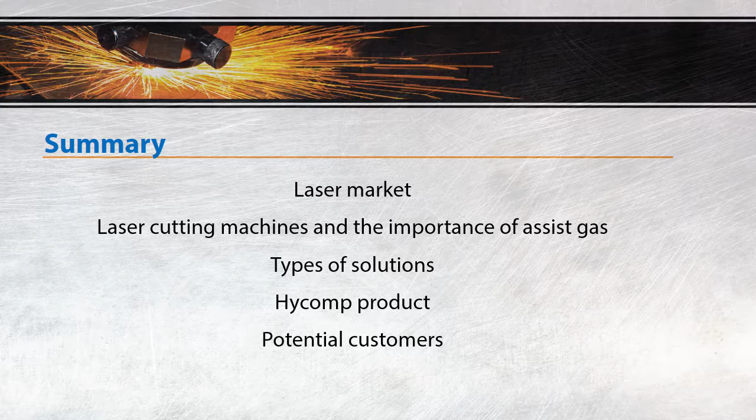How much air does a nitrogen generator need? Robert, that might be a Robert question. Sure, that's actually a great question and probably best addressed with your nitrogen generator manufacturer. But to give you some idea, at 4.9 purity, we were about 5-6 times air-to-gas ratio. So assuming you had, say, 3,000 SCFH of nitrogen, that would be say 17,000 SCFH of air delivery to the nitrogen generator. Again, you'll definitely want to verify that with your manufacturer. That's a fairly rough number, but interesting how much air it takes to make that nitrogen.

Absolutely, yes, it's a significant quantity. And as you go up in purity, say to 5.9s, that can jump to maybe 7 or 8. As you go down in purity to maybe 3.9s, that may drop to 2 or 3 or 4. Wow, so it is very dependent upon the purity of that nitrogen.

So what you're cutting would affect what type of pressure you're coming in at. It does. I think most generators are not capable of constant adjustments. Again, something to talk about with your generator manufacturer, but most generators I've been familiar with over the years maybe have 1 or 2 set points you can adjust between if they've got that capability, but they're not usually infinitely adjustable. The timing cycle of that pressure swing is very critical to holding that purity, and the flow speed of the gas velocity over the carbon molecular sieve. So it's really not something that's adjustable regularly.